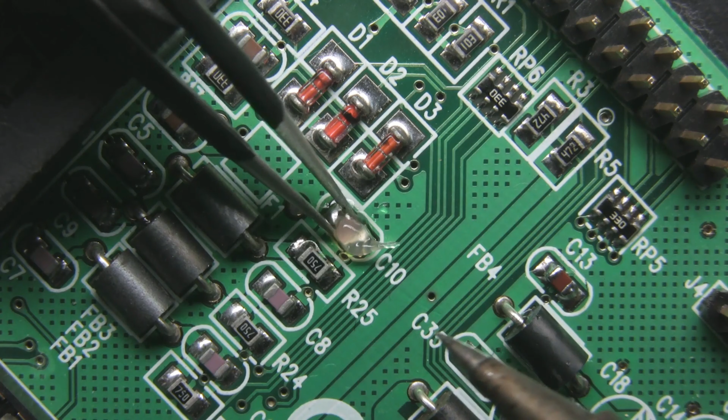Beginning with, vehicle platooning is the driving of a group of cars in succession, and vehicles that are being driven in a line are called a string. It also involves knowledge about controllers, and here integral control is used, that is a subtype of continuous controller. Integral controller involves controller gains and actuating signal, and here the output signal is directly proportional to

the integral of the error signal. It is also known as reset controller, as we can make the control variable go back to the set point or desired value after a disturbance is created. We are also concerned with the constant system stability, which means the system is stable if for every input we obtain

an output signal. With vehicle platoon, acceleration, deceleration, braking, changing, leaving operations are involved, along with join platoon, leave platoon, merge platoon, split platoon, cut in and cut out. We have selected certain terms to represent the system, that is, it is an interconnected system and consists of n agents, and n is the number of vehicles.

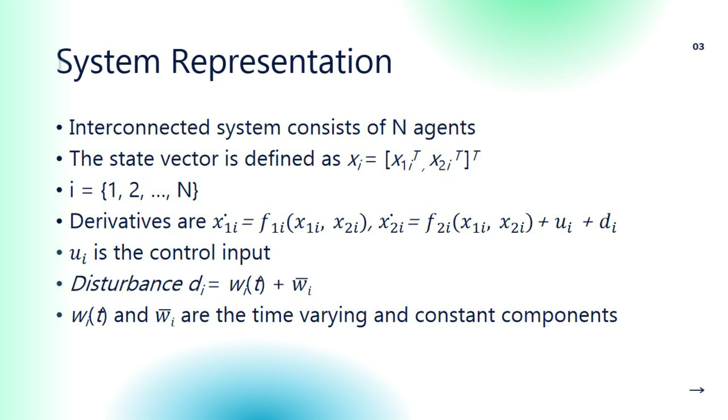We have represented the state vector input xi in the form of a vector matrix, and further i represents the number of vehicles, and disturbance is a function of omega i(t) and omega i bar, which are the time varying and constant components. As it is the demand of the research paper, by applying conditions and proving DSS properties, we would have to obtain the C1, C2, C3 equations to select the controller.

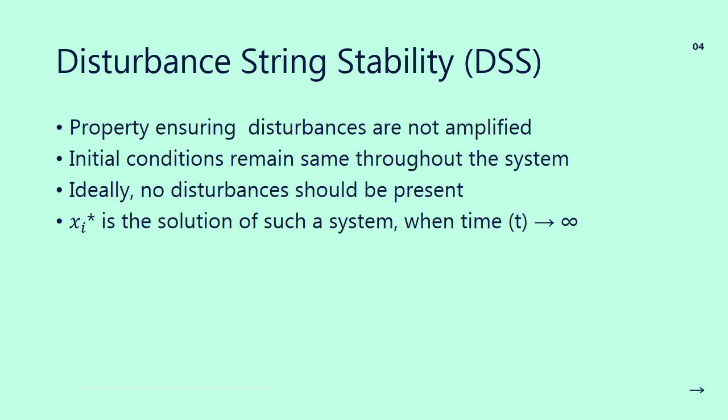DSS are the properties ensuring that the disturbances are not amplified. Initial conditions remain the same throughout the system. Ideally, no disturbance should be present, and the time should approach infinity for such a system solution. Controller dynamics involves the controller designs and controller gain.

Disturbances are represented as class KL and class K infinity functions. Class K functions are used to check the stability of the system by checking the bound of the signal. We're also applying the Laplace transformation, matrix norm and L2 vector norm. Vector norms are non-negative numbers that describe the length or magnitude of a vector in space, and by applying

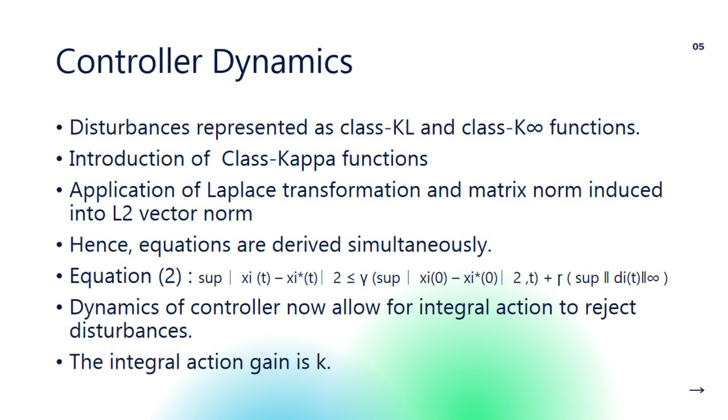Dynamics of the controller now allow for the integral action to reject disturbances, and we represent the integral action gain with the help of K. Similarly, by applying the previous concepts of class K, Laplace transform, matrix norm and vector norm for the integral action, for no integral action where K is equal to 0, we have obtained the C1, C2, C3 equations, by the help of which we will select the controller.

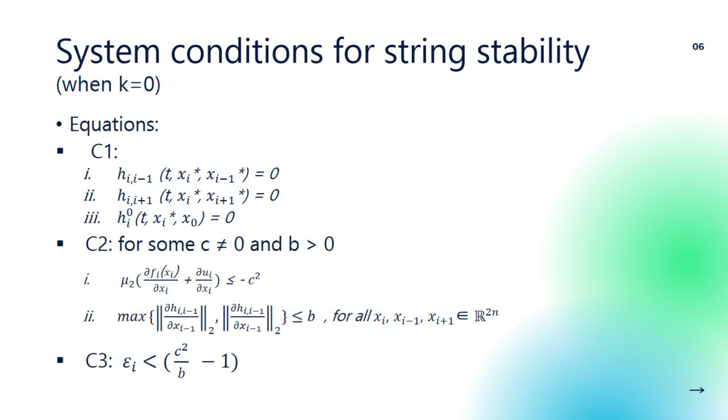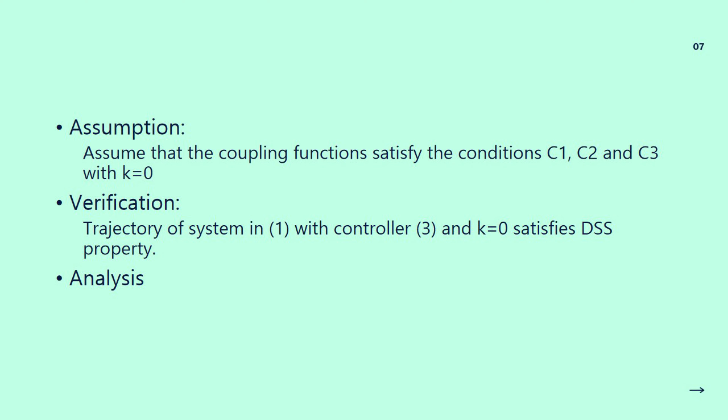Here we assume that the coupling functions satisfy the conditions C1, C2, C3 for no integral action. That means that the disturbance string stability properties have been set, and C1, C2, C3 provide a tool to select a controller that ensures stability, and this should be able to compensate for constant disturbances at least.

Since the controller which was derived earlier was not able to compensate for constant disturbances, the controller dynamics were then altered to achieve disturbance rejection. So state vectors, functions, and reference states must be modified. Also, a change in coordinate system is needed from x to z, which is shown by equations 7 and 8. Moreover, equations for transformed conditions are developed, and these are represented as C1*, C2*, and C3*.

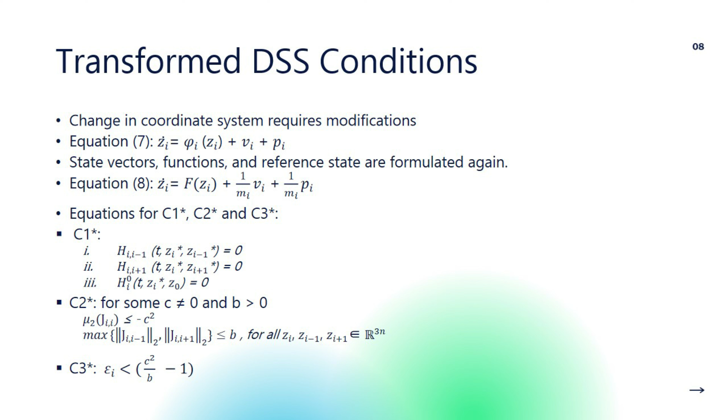You will notice that C2 star involves Jacobian transformation, which is a mathematical technique used to convert from one coordinate system to another. Now, to verify that DSS property is satisfied, we will take an assumption that the coupling functions satisfy C1, C2, C3 stars after setting the integral action gain to 0. From the analysis performed, we found out that C1, C2, and C3 stars are satisfied only when C1, C2, and C3 conditions are verified for the initial system considered. Also, when coordinate system was changed, the system ensured DSS property.

Now, looking at the transformed closed-loop dynamics, when C1 was applied, C1 star was obtained. Conversely, we can say that if and only if C1 star is satisfied for the transformed closed loop dynamics equation number 14, then the condition C1 is satisfied. For C2, closed loop dynamics equation number 12 must be differentiated and also obtain Jacobian matrices. After putting partial derivatives, matrices were obtained and the condition C2 was verified. This implies that C2 is satisfied for transformed closed loop dynamics if and only if C2 star is satisfied. And similarly, condition C3 star follows directly from C3.

One thing to note is that to use the conditions C1, C2, and C3 stars, the transformed system is not required. However, the Jacobian and transformation matrix is necessary. By taking further assumptions and performing analysis, we further prove that if the augmented system is disturbance string stable, then the original system must be stable as well.

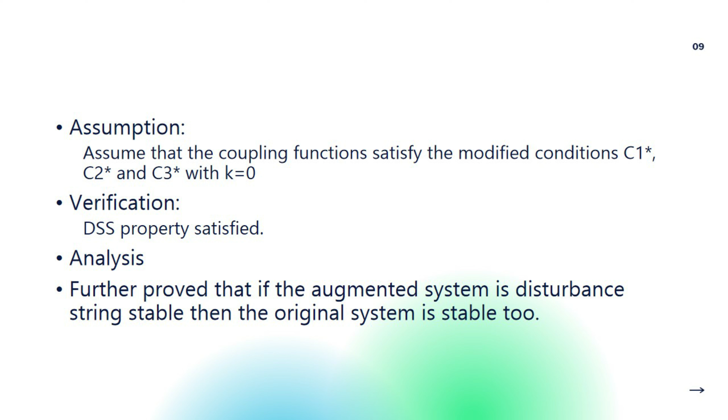For the simulation part of this research paper, for handling complex calculations, software packages such as CVX were used. A platoon system having 5 vehicles or agents was selected, and it has position and velocity vectors as shown. Initial conditions are also defined, with intervehicular spacing as 10 meters and reference velocity as 20 meters per second. Equations for time variant disturbance and the constant disturbance are also shown.

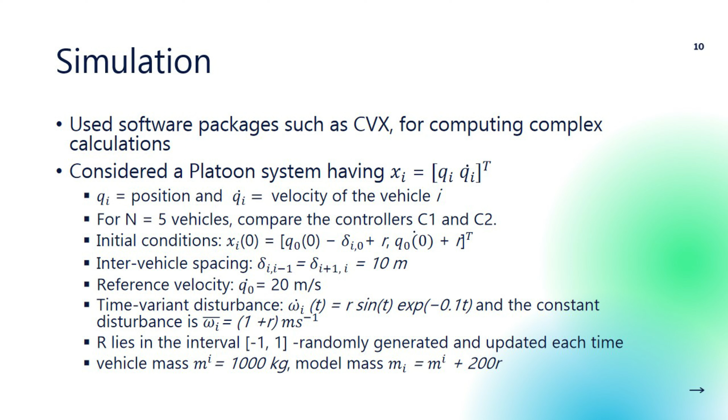Note that the R used in above equations is randomly generated by the software and lies in the interval -1 to 1. Masses are considered as 1000 kg for a single vehicle, and the mass taken in a computer model is represented in the equation shown. The results were calculated and plotted as graphs. These three figures represent the simulation part of this research paper.

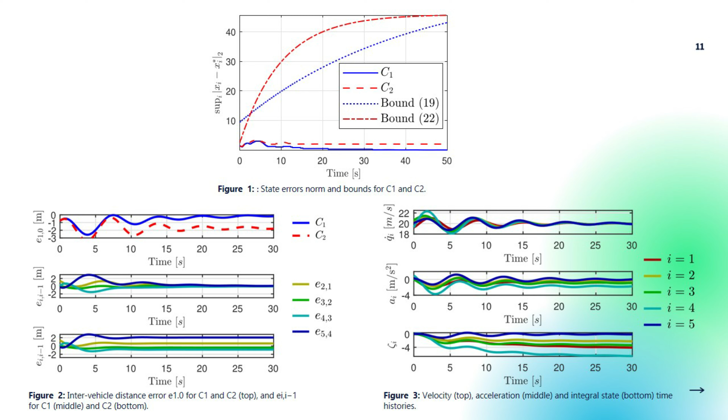The first figure shows state error norms and the bounds for C1 and C2. The second figure shows the inter-vehicle distance error deviation from the desired values along the string of vehicles. And the third figure shows velocity, acceleration, and integral state histories. From figure 1, we can comprehend that C1 error norm is large and C2 error norm is comparatively small.

From figure 2, we understand that intervehicular distances that were set at 10 meters do deviate from the desired value as we go along the string. C1 compensates for constant disturbances, but C2 cannot fully compensate those disturbances. In both cases, there is a deviation. However, for C2, this deviation prevents the distance from being in the desired range of values.

Figure 3 is basically a comparison of the velocities, accelerations, and the integral states of each of the agents in the string. The parameters stated are within the range that is accepted, and we can also see that amplification is not extreme along the string. That is, the disturbances do not cause the errors to be amplified along the string. Of course, if large errors are present, then velocities and accelerations will be disturbed much more. That is, those disturbances will be amplified.

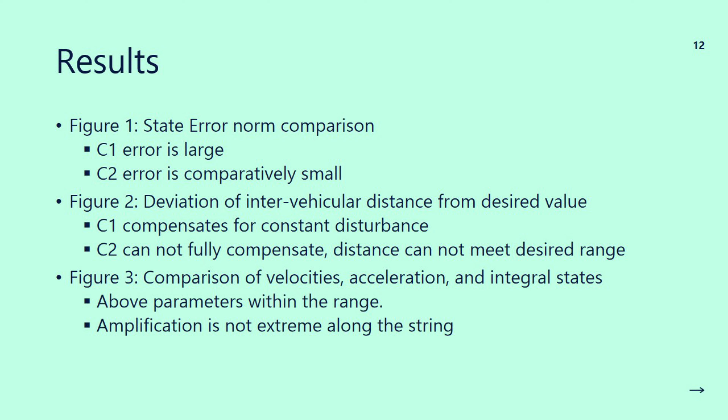Now, to sum up what we've learned so far, this research paper revealed an idea for achieving string stability of a vehicle platoon. In it, a controller was designed with integral action, which was different from other previously proposed controller designs. Hence, the controller was able to keep the state errors bounded. It also effectively compensated for constant disturbances entering the system.